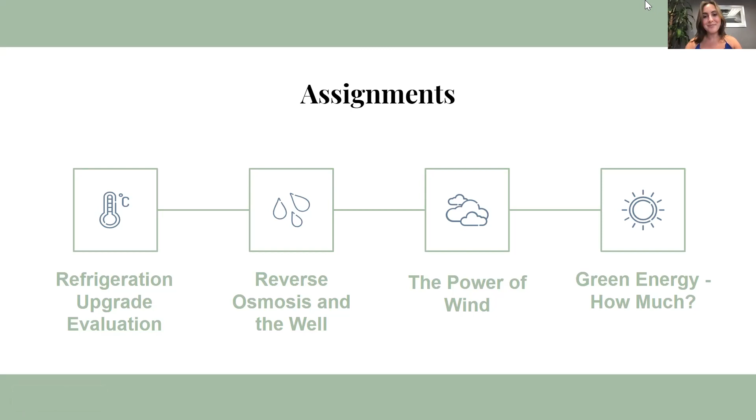The first topic the engineers will talk about is the new refrigeration system. I'll start this section off by showing you a video I made. It's a quick one, talking about the new refrigeration system.

Wait, pause it, I can't hear the audio. Thank you, thank you.

The average home requires between 600 and 650 kilowatt hours a month, so 680 kilowatt hours is more than enough to power a home.

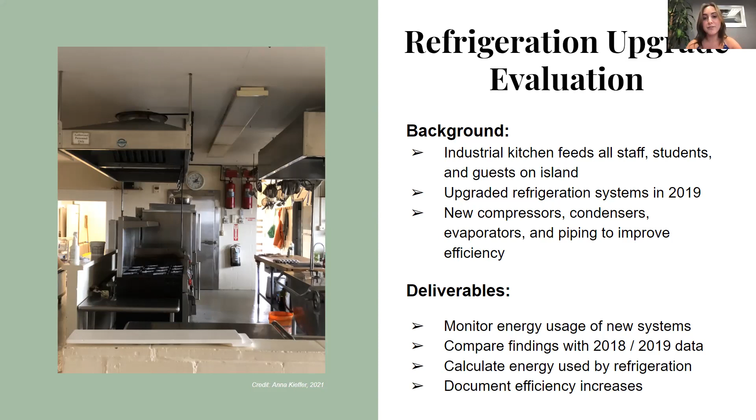Our first deliverable was to work with SML staff to set up metering to monitor the energy usage of the new refrigeration system and compare those findings with the 2018 and 2019 data. We also calculated the energy used by the refrigeration system as a percentage of SML's total energy consumption, and documented those efficiency increases realized through the installation of the new equipment.

As a result of the fluctuating sinusoidal pattern of an AC current, there are inherent inefficiencies in power distribution. Nevertheless, we're able to measure these efficiency gains through VARs and watts provided by the Fluke meter, which ultimately helps us calculate volt amps. A good way to visualize this is through the beer analogy.

So everyone visualize a cold glass of beer. Pretty much the beer represents the active power, which is the watts. This is the useful power, essentially the energy that is doing the work. This is the part that you want to drink. The foam on the top represents the reactive power, or the VARs, which is wasted or lost power. It's the energy that's being produced but isn't doing any work. You don't really want to drink this part, but the foam ends up on your upper lip anyways.

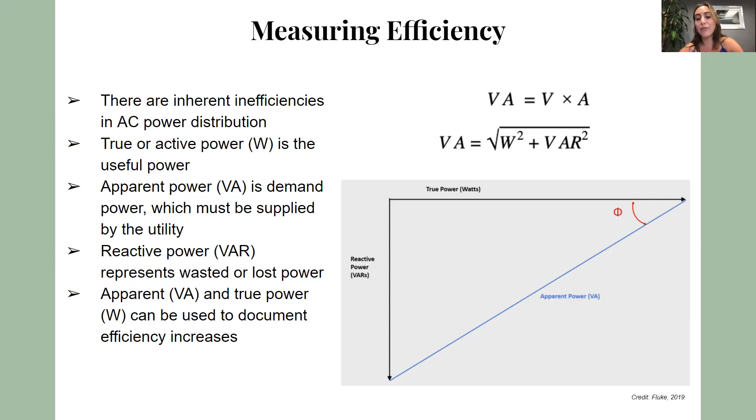The data was compiled onto USB and analyzed via the Fluke instrumentation software with the help of Justin Ulrich from Unitil. This Fluke meter collected both VAs and watts, and we were able to compare this data collected earlier this summer to the data that was collected by previous interns in 2018 and 2019.

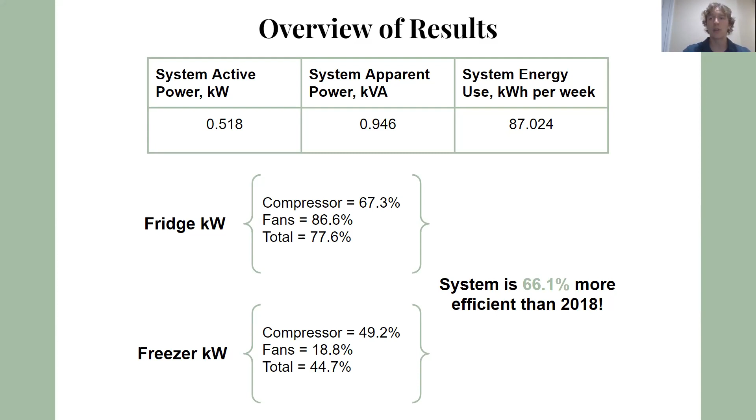So in conclusion, the efficiencies realized by upgrading the piping, condensers, and fans on both the fridge and the freezer reduced the apparent and active power by 48% and 66.1% respectively. This resulted in active power use of about 87 kilowatt hours per week, which, when spread across the entire summer, represents about 3.8% of the total island energy use — a drastic improvement from the old system.

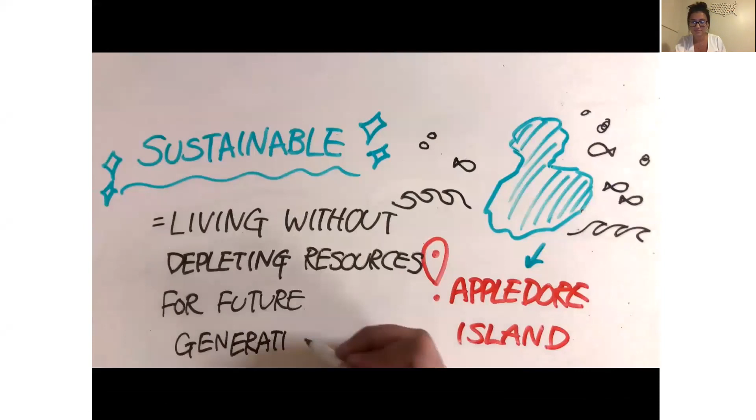Hi, welcome to Shoals Marine Lab. We are an island in the Gulf of Maine off the coast of New Hampshire and Maine, where we study marine sciences and sustainability. Being sustainable means being able to live without depleting resources for future generations and being mindful of what we use. While it's super important for all of us to be sustainable every day, it's extra important here at Shoals Marine Lab because we're an island with very limited resources.

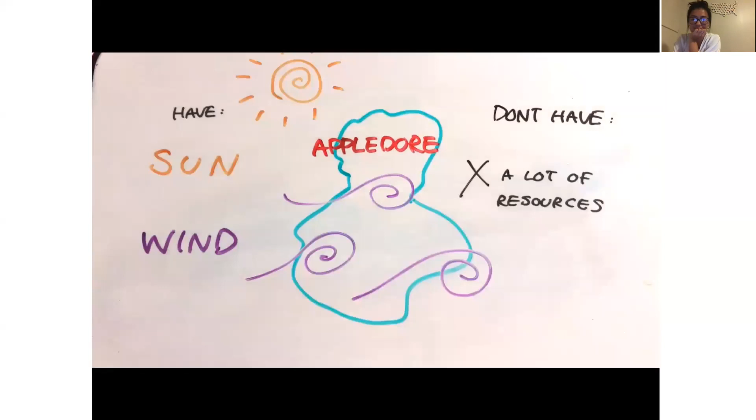Despite the limited resources, you know what we do have a lot of? Wind and sunlight, which is why we have a wind turbine and a lot of solar panels. We get the energy to power the island from the wind and sun, but that still leaves us with how we get our fresh water.

Although we're on an island surrounded by water, our fresh water supply is extremely limited because we have an abundance of salt water and not so much fresh water. We do have a well on the island that can supply us with fresh water, but it relies entirely on rainwater, so it's also extremely limited in how much fresh water it can provide for the island.

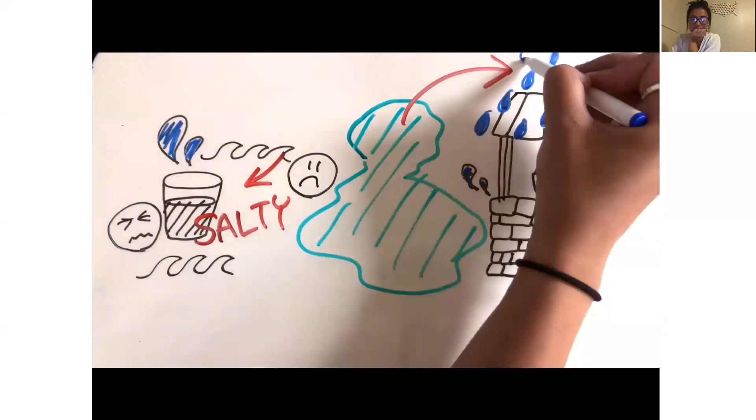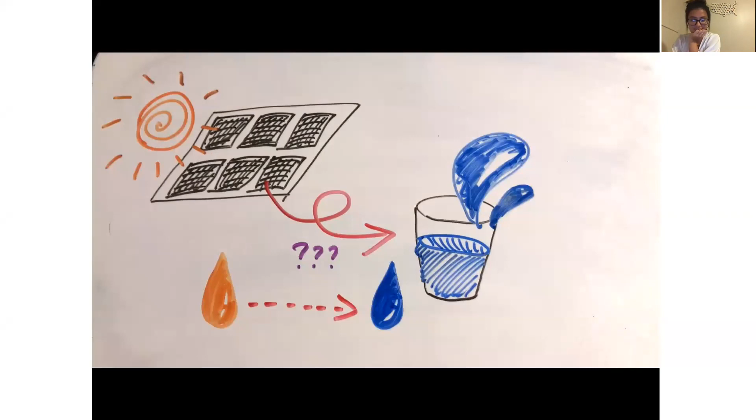So the question we've been trying to answer is: how do we get enough fresh water to supply the entire island from salty ocean water, while also not wasting any energy from the solar panels? The answer is a process called desalination — the process of removing salt from ocean water.

At Shoals, we use a reverse osmosis machine that removes salt from water to make it drinkable, also known as a live stream water purification system, and also commonly known as the RO.

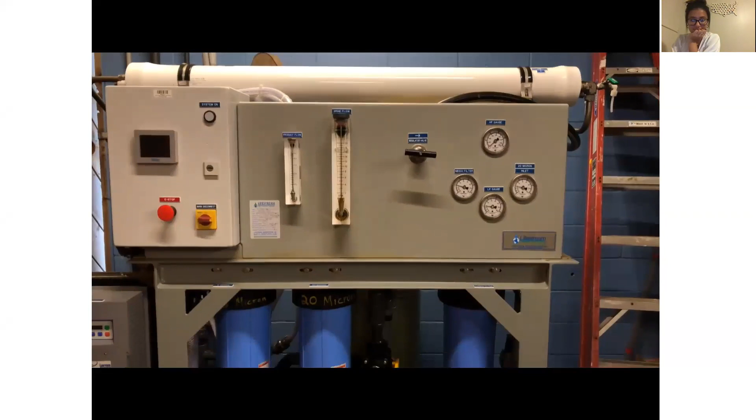This year, our engineers have been working to find out how to use every last drop of available energy from the solar panels by transferring the surplus solar energy into the RO to make as much fresh water as possible. They've looked at daily water use, rainfall data, energy usage of the RO, well water data, electrical demands of the RO, and more, so we can rely on the RO as more of a mainstream water source while making sure it's still efficient and powered by the sun.

Shoals Marine Lab is working to maximize its use of renewable energy by making sure not even a drop of it goes to waste. We make sure our solar energy is either used by the island or by cranking out fresh water from the ocean. While one RO isn't going to change the world, the concept of not wasting green energy most certainly will. Thank you so much for watching. Bye!

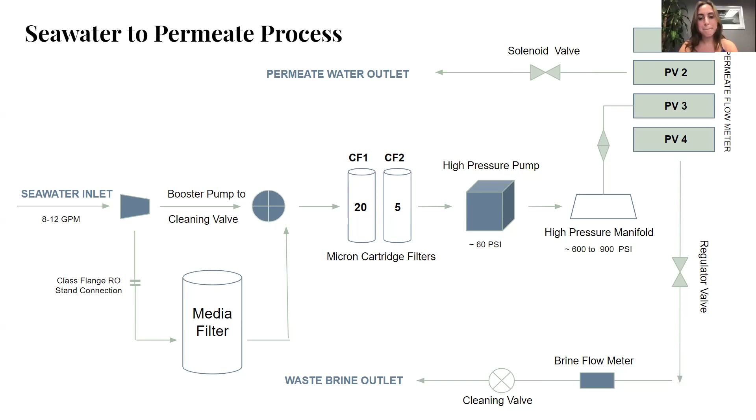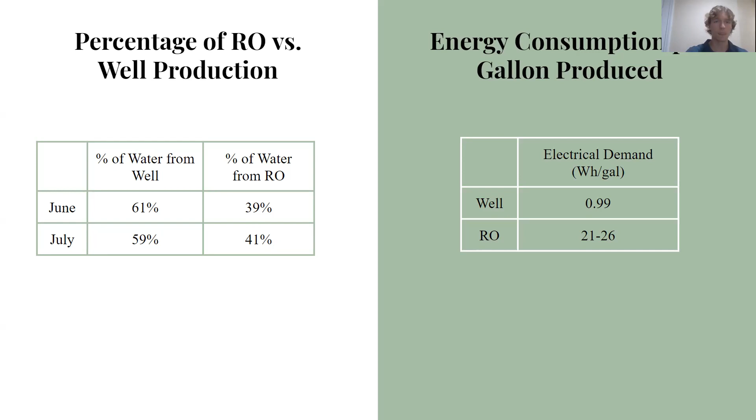Now, to obtain that well electrical usage, we use the fluke meter on the well pump. This pump activates once the cistern that contains the water to be chlorinated reaches a certain drawdown level, activates a pump that runs at 17.6 gallons per minute from the well. It runs for about half an hour and draws just over 1 kilowatt during that time period, resulting in just over half a kilowatt hour for that time period.

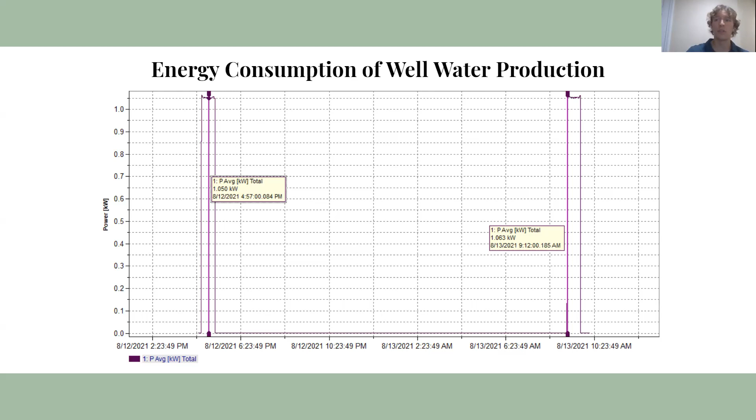Now, in terms of water production for the island's usage for the whole summer, the average daily water use this season was about 1,245 gallons per day. And while the RO can keep up with this demand if run for about 7 hours every day at its normal 3 gallons per minute, this is not what we would recommend. That is because it uses much more energy than the well.

If the well has enough water in it, we can tell that by the meter that was installed. We know the approximate water level. Then the well should be the primary source of water for the island. On summers that may be drier, we suggest running the island off of well water in the beginning, and once that well level meter reaches a certain drawdown level to be determined, then the RO should be activated and used to supplement the drinking water for the rest of the summer to prevent that well from running completely dry.

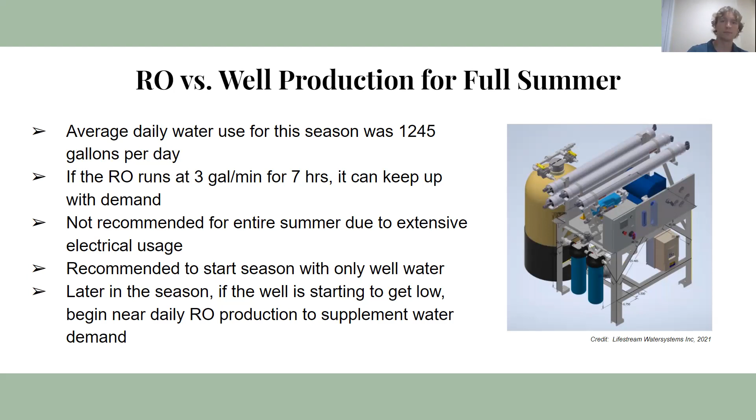After speaking with the manufacturer, it was recommended that the RO is run at a frequency of 54 to 60 hertz for the best health of the membranes. At this frequency it is less likely for particulates or small things to get stuck in the membranes and keep them not clogged. We also recommend to regularly backwash all the filters and the membranes of the system.

Brooke covered these various membranes in the schematic, and they are prone to clogging. So keeping those backwashed as well as flushed with fresh water to kill any potential marine microorganisms that may have found themselves in there is a good way to keep these filters clean and happy.

Furthermore, once the RO is activated in a particular season, it should be run every day or almost every day to prevent those membranes from fouling, which can happen if they are left to sit too long. And it should also be run for longer periods of time per day in order to improve that efficiency and realize the most out of the energy use.

Finally, as I'm sure most of you are aware, SML follows some pretty fun and stringent water use policies. The tried and true: if it's yellow, let it mellow, and not letting water flow unused. So we strongly recommend we upkeep those practices to reduce the water use on the island.

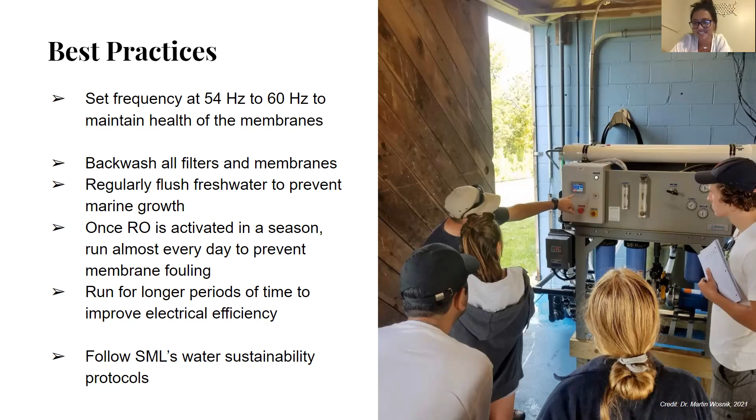And the third project our engineers are going to be talking about is the new wind turbine, which again, you will see a video that I made on this topic.

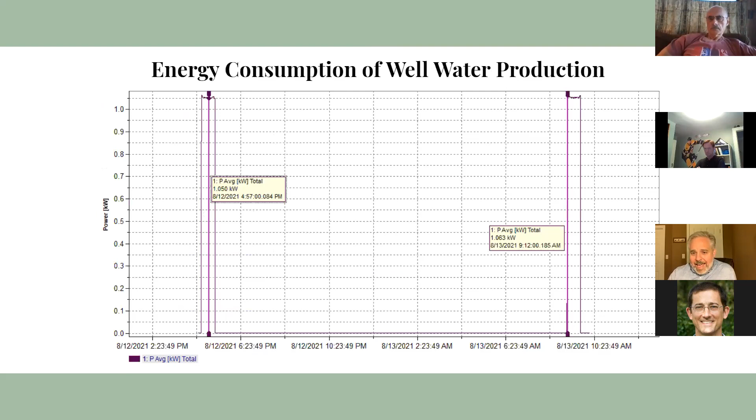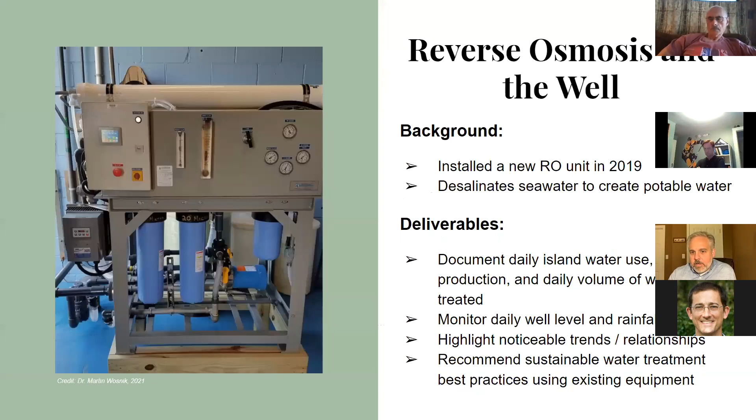I'm curious in regards to the fridge itself. Are there any specific design aspects of the new fridge we can point to that show why it's so much more energy efficient than the older fridge? Are there aspects in terms of insulation or things to that regard?

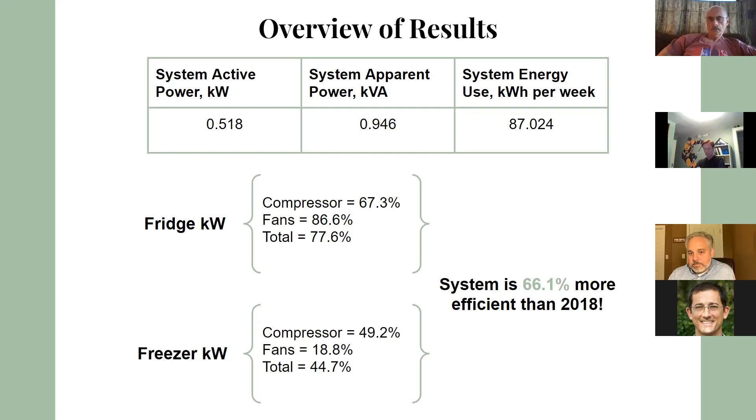So the old fridge was installed in the 1970s, so it was like 50 years old, and it was being very, very inefficient. I think just having an updated system was able to increase the efficiency by 2/3. But I could also pull up a bit of the model and look into that if you're interested.

Yes, please. I mean, the age certainly is a factor. That's something we talk about all the time with our own customers.

So Alec, I can just add my 2 cents here: the doors got replaced. That was the other thing, not just the energy running equipment, but the seals on the old doors were pretty bad. There was always ice between the freezer and the walk-in because of all the leaking of energy from the freezer. And of course, an old refrigerator with bad seals is going to make the refrigerator run more. So that was the other improvement done in that upgrade.

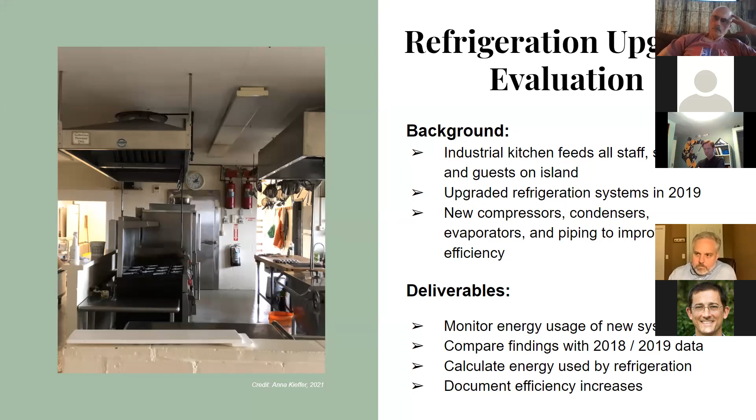Just a couple of comments, perhaps some questions to feed off previous people's comments. When you look at the RO power draw, because of the way that y-axis is scaled, it's not an incredible savings. You're dropping from like 4.3 to 4.2, and it looks like it pretty much plateaus there. Running that for a longer period of time, it's still going to be an incredible energy draw compared to the well.

So I kind of agree with Jen there. If you can run this when your supply of power exceeds your demand, during very sunny afternoons when your batteries are full, you can go ahead and run this RO there, but still you have to create that balance, think about how much energy this is really drawing compared to your well, which is less than 1 kilowatt. Even at its max here, it's not even a 10% savings over time, even though it does become more efficient.

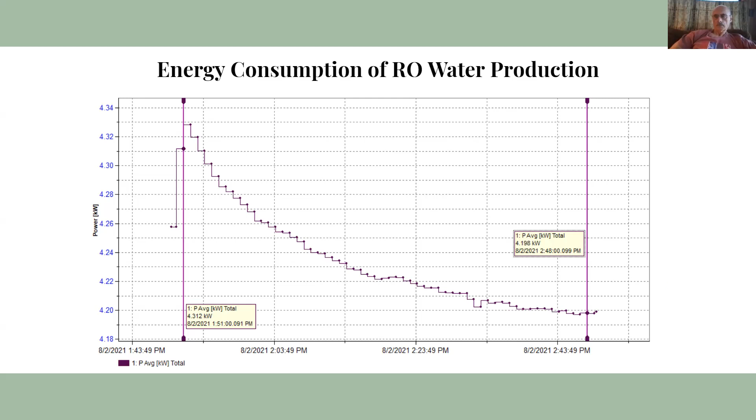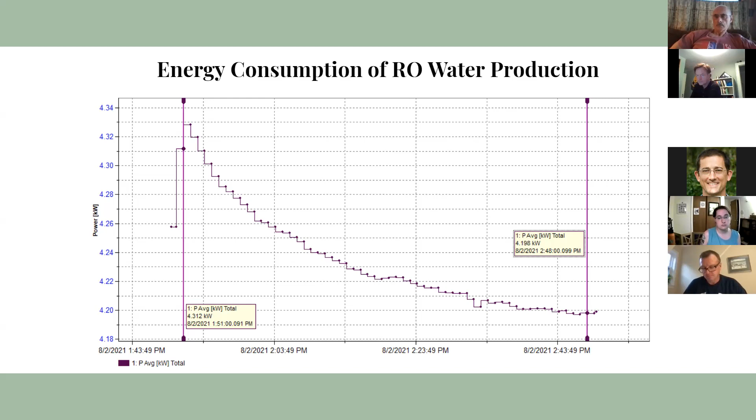And then back to Alex's point on the refrigerator, don't forget about conservation. For the staff, probably most of that conservation, if you think about it, comes from changes in behavior. I think behavioral changes in the kitchen could help as well, in terms of the number of times the doors are open, but also a full freezer and a full refrigerator are more efficient just because they're filled with materials that are the same temperature as what the freezer and fridge are trying to regulate, versus airspace where hot air, warm air gets in there. Also things like eggs are sterile, so it's not a big deal that they be left out for a while. Inside that membrane, eggs are sterile and they don't need to be rushed right back into the refrigerator. So just behavioral changes like that could help as well.

That's a good point. Thank you.

Glenn, the eggs go into the reach-in refrigerator, so we couldn't save on that one, not with eggs. Well, good, I'll think of something else that's sterile and let you know. Okay.

Actually, I got the mic here. Chris, go ahead. You know, July, I don't know what it was on the islands, but July was one of the wettest months in decades right here. Was that the case on the island? And why were you running RO during the month of July?

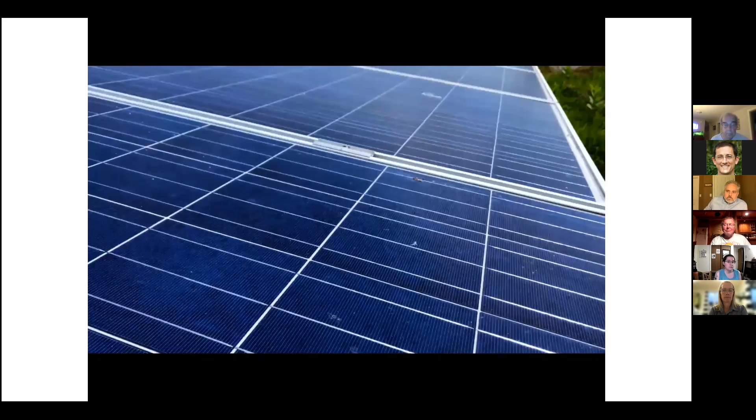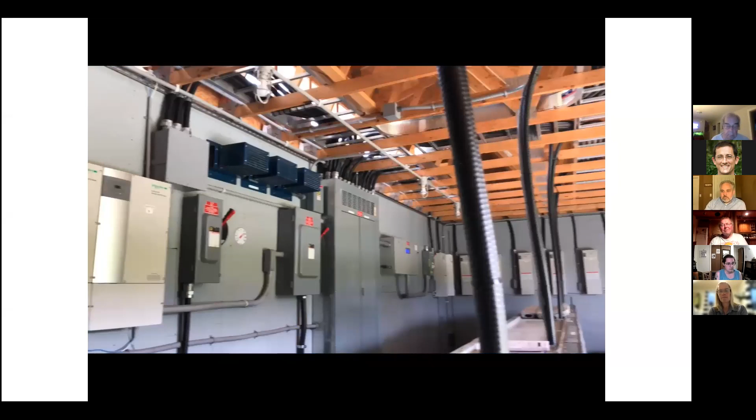As part of the Sustainable Engineering Internship, we were tasked with looking at this new wind turbine, which was just installed, and trying to see if it's producing the energy it is rated for from the manufacturer. We've done some graphs in the past few days looking at the theoretical power curve, or what the specification sheet listed it should be producing, and then we graphed the actual power curve of what it's actually producing over the past few months, and they are very aligned. So it is working up to code, which is very good.

So at Shoals this week, the wind turbine has generated about 30 kilowatt hours of energy per day, which in a residential home would take about 20 days to generate the monthly energy consumption of 600 kilowatt hours.

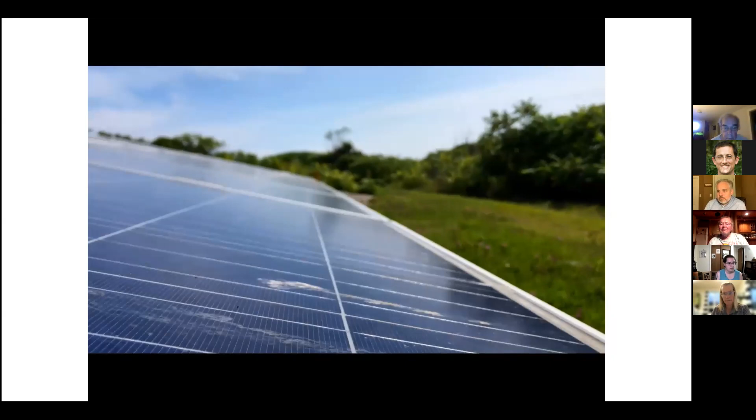So overall, wind turbines are a lot more efficient than solar panels. In fact, they're about double the efficiency of solar panels, whereas a solar panel can produce about 23% of energy per day, wind turbines can capture about 50% of energy. As opposed to solar panels, which need sunlight, which obviously is not out at all times of the day, wind can run during the day and especially at night.

As an environmental engineer and marine biologist, it is an absolute dream to be on this island. It fuels my heart just how the wind turbines fuel the world.

Wow, was that good? That was it. That was so good, that was so good. Thank you so much, Anna, for embarrassing me.

But now it's time for the Power of Wind assignment, which is our third assignment.

So just to give you guys a little bit of background, Shoals Marine Lab operated a 7.5 kilowatt turbine from 2007 up until the spring of 2019, when the turbine started experiencing internal electrical failures. The unit was then replaced in the spring of 2021 with a 10 kilowatt Bergey wind turbine and an upgraded VCS2 charge controller. So wind power contributes significantly to SML's green energy grid because it has the capability of providing power at night and during stormy weather when the island's photovoltaic systems are less effective.

Under the direction of Professor Martin Wosnik from the Department of Mechanical Engineering at the University of New Hampshire, we were asked to quantify the energy output of the new wind turbine and then compare those findings with theoretical outputs suggested by the manufacturer. Ultimately, our job was to confirm that the turbine is operating as expected and provide an analysis of the contribution wind energy is making towards Shoals net energy production.

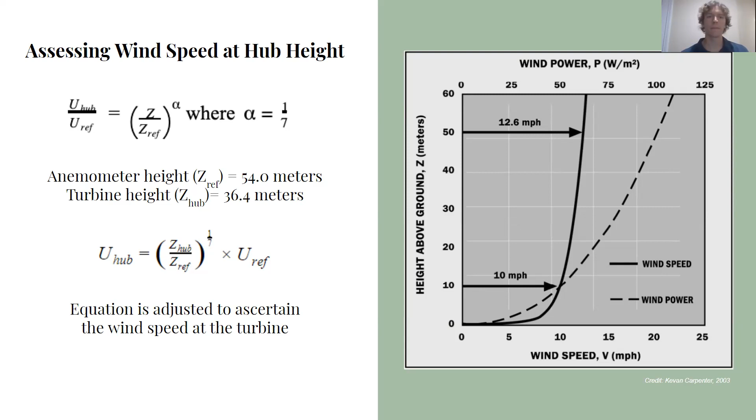So the amount of power generated by wind turbines depends on density, velocity, volume of air, as well as the swept area of the wind turbine blades and the blade design. Due to generator inefficiencies, friction, and blade design, wind turbines can only convert a maximum of 59.3% of the kinetic energy into mechanical energy, and this is known as the Betz limit. Therefore, the coefficient of power is used to determine the efficiency of the turbine's power production relative to the maximum power available in the wind.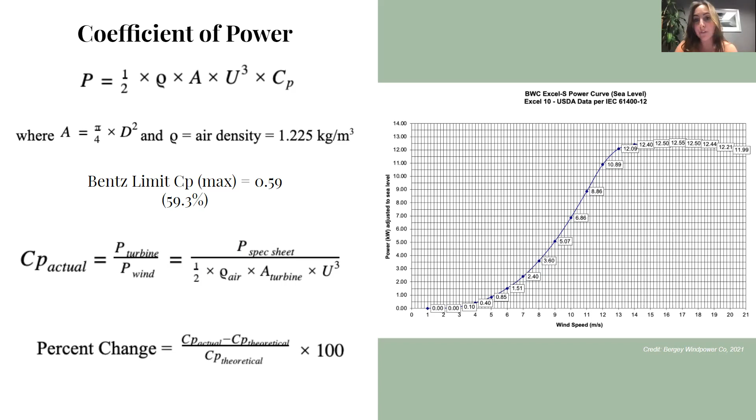So on the right, the tabulated power curve shows this logistic growth rate, graphing the power output versus the wind speed. At around 12,500 watts, it reaches maximum power output. We're not sure if this is just wind or if this is because of the coefficient of power being the theoretical maximum efficiency for a wind turbine that can convert kinetic energy into mechanical energy.

Now, extracting data from the dashboard, and it was like 60,000 data points, we collected the wind speed from the radar tower and then its actual power output. That wind speed from the radar tower was then adjusted to account for the decreased elevation at the wind turbine, utilizing the equation referenced in the slide previously.

The actual power output and the wind speed were then graphed in conjunction with Bergey's theoretical power curve, which was displayed on their website. And as you can tell, the actual power curve is highly correlated to the theoretical power curve, excluding some minor outliers.

Now, while the average coefficient of power for the theoretical model was... I'm sorry, I mixed that up. Our average power coefficient was 24%, theirs was 21%. And so as a result, we are 14.3% more efficient in terms of coefficient of power. This might be because of a super windy, turbulent summer, and we recommend that interns in the future do more calculations to determine if this is entirely accurate.

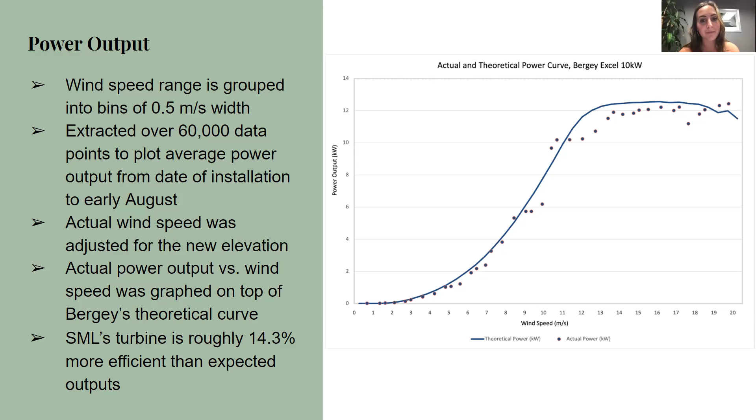So as Brooke mentioned, while we initially had realized a 14.3% more efficient turbine than predicted, we did run into a little bit of a data snafu just a few days ago that we need to address.

The charge controller from Bergey, which regulates the power output from the turbine into the battery bank, does not provide the power output data in a user-friendly way that can be displayed on SML's dashboard. So instead, we have another meter called the AccuDC that reads that charge controller and displays the data instead.

It was initially assumed that the AccuDC had a constant offset, meaning that even when the turbine was not spinning, the AccuDC was still reading a power output of about 0.3 kilowatts, and that this was constant no matter the wind speed or the power output read by the charge controller.

However, just a few days ago, it was brought to our attention that this is not the case, and we started taking data points to see what we could find. We actually realized this chart and relationship on the right.

On the x-axis is the power output shown by the charge controller. We know that because both the charge controller and the AccuDC both have visual displays on them, so we took these data points by just taking a picture of the displays at the same time since they're updating so rapidly. The difference between the AccuDC meter and the charge controller is on the y-axis, and the charge controller's real power output is on the x-axis.

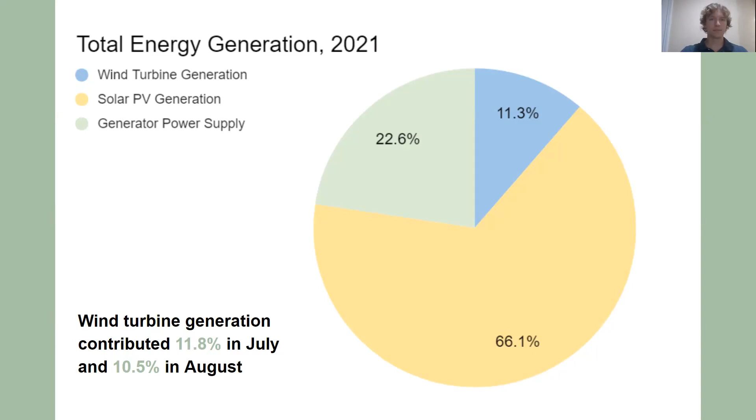Now, finally, I'd like to make some conclusions and recommendations on the wind turbine and its operation. For one, after speaking with a Bergey technician, the manufacturer of the wind turbine, he recommended that we do our best to limit the turbine's free spin. This happens when the battery capacity that the turbine is attached to reaches its maximum voltage and maximum capacity, and the generator disconnects and the blades are just spinning but not generating any power.

While he said this is fine electronically, it may lead to long-term damage of the blades mechanically, and we want to limit this as best as possible. We can do this by adjusting the float voltage or the set parameters of the solar and wind charge controllers on the batteries so that the interactions are more friendly and do not damage the turbine by letting it free spin.

In terms of the data collection by the AccuDC and the solar charge controller, it would be considered to install a third-party software to directly read data from the charge controller rather than rely on the AccuDC. Or alternatively, the AccuDC could be appropriately adjusted using that equation found on the power offset graph.

Using that equation that relates the power offset and the power output, we can adjust the data read by the AccuDC to then show more accurate data on SML's dashboard. So either adjust using that equation, or simply recalibrate the AccuDC and continue to observe that power offset to see if it makes a difference.

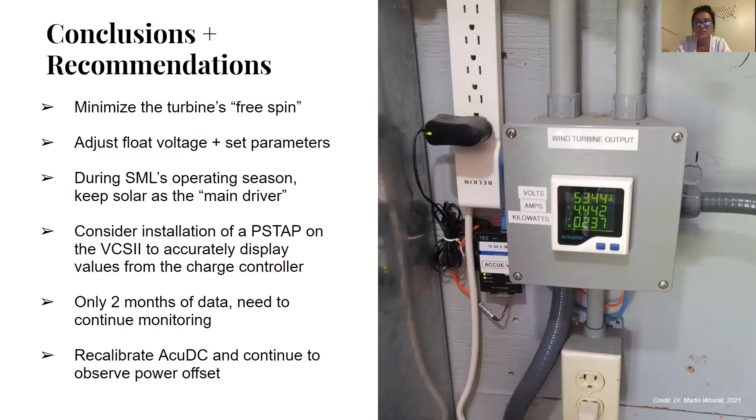So the fourth and final project is the green grid. I did not make a video on this, but I do have a final one, and the visuals in the presentation make up for that. So take it away.

Alright, so SML currently maintains 3 independent green energy grids that combined include 92 kilowatts of photovoltaic panels, 1 10-kilowatt wind turbine, and then 470 kilowatt hours of battery storage.

But during periods when stored energy is depleted, SML operates a 27 kilowatt diesel generator that's usually turned on in the night from 2 a.m. to 7 a.m.

With the help of Professor Martin Wosnik and Lee Consavage, Zach and I looked into how we can integrate the currently independent green grids with the goal of increasing the percentage of Shoals electricity production using green technologies. Using data from SML's dashboard, we analyzed the current ratio of green energy to diesel-powered energy sources, and then determined what additional infrastructure is needed to consistently reach those 95 to 100% green energy utilization rates.

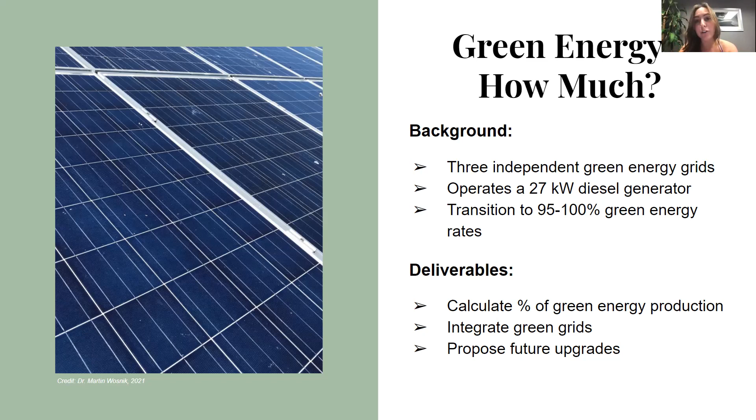Now, this is a very basic schematic that I made representing the relationships of the main grid, the K-house, and the radar tower. So the main grid supplies the majority of power for Shoals Marine Lab, and at rated capacity, at maximum capacity, it has 65.5 kilowatts between the photovoltaic panels and the 10 kilowatt turbine.

The K-House solar panels power the saltwater pump, which supplies water to the sea tables, the faucets, the reverse osmosis unit, as well as the fire hoses. At maximum capacity, it can produce 29.4 kilowatts.

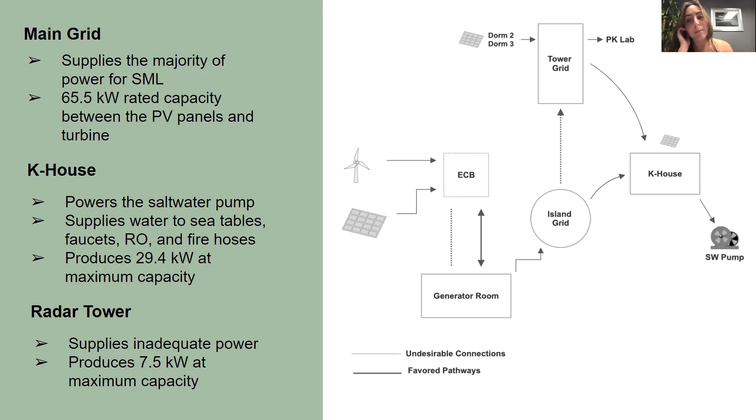And then lastly, the battery storage at the radar tower is outdated and therefore supplies inadequate power. As a result, the tower is always buying from the main grid during the summer, and data indicates it has gotten significantly worse. But at maximum capacity, it can produce 7.5 kilowatts of power, which then powers dorm 2 and 3, as well as the PK lab.

To improve the current percentage of renewable generation on Appledore, it's necessary that we calculate how much the island is currently relying on diesel generation. With that said, we summed up the solar generation and the wind turbines, as well as the generator production, and we compiled it all together to obtain the total island green generation.

With this, we utilize this as our denominator when finding the percentage of green energy versus the percentage of diesel generation. As a result, our results at the bottom show that the green energy percentage from July to August was about 76 to 78%, whereas diesel generation was about 23 to 21%. Our goal is to transition this from a 75 to 25 ratio down to a 95 to 5 ratio.

So as Brooke mentioned, the big money $100 question is how do we reduce diesel reliance? We can do that in a few ways, mainly these first three that I'm about to mention.

One, we can improve the communication of the three green grids so that they are not operating independently as they are currently. If they can communicate better and distribute and take energy from each other when one grid needs it more than the other, then that would reduce the diesel generation and improve the communication and compatibility.

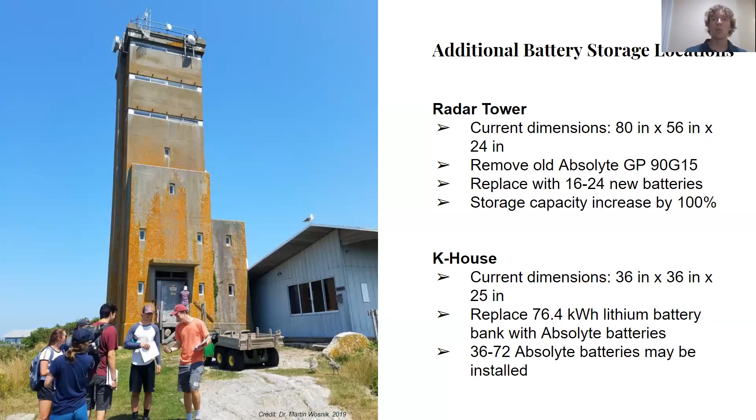So the major takeaways for this are that there are options for reducing generator use depending on how close you want to get to 100%. While that 100% renewable goal sounds wonderful, and it certainly is, it's not necessarily feasible, and you have to consider the trade-offs of cost and battery capacity and infrastructure necessary to reach that 100%.

As I mentioned before, just that difference between 99.5% and that 100% was a huge increase in PV and battery capacity.

Utilize the existing space and infrastructure that we have in hand. There are old PVs on dorms 2 and 3. We can remove the panels but keep the mountings and electrical equipment to save money there. Use the battery storage, use the space in the radar tower that's already set up to handle batteries. The equipment would need to be replaced because it doesn't match the Schneider equipment we have here in the ECB on the right, but the area is available.

I'd also like to point out that models are currently being developed by a couple of groups. Dr. Martin Wosnik from the University of New Hampshire is working with a couple students to accurately create a model for battery capacity and infrastructure necessary to reduce this diesel percentage. And I believe a group from ReVision Energy is doing something similar - that's Lee Consavage had mentioned that. So while these are preliminary estimates to consider, it's recommended that we compare these results with the results from the model.

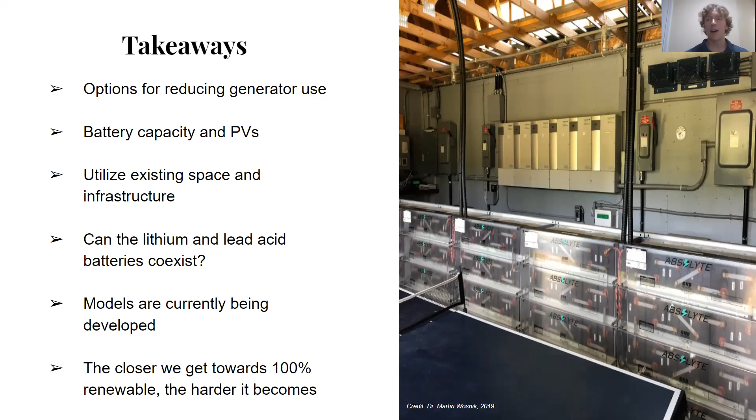Final takeaway, as I said, the closer we get towards 100% renewable, the harder it becomes. And I would love for SML to get there, but it will take a lot of infrastructure and cost.

Thank you so much for concluding that, Zach. One of our final slides is about future project suggestions. Unfortunately, Zach and I were only on the island for 2.5 weeks, and we were not able to get done or look into other projects as much as we'd like to. However, we do have quite a bit of suggestions for next year's SEI interns. The first one is anaerobic digestion to sustain the kitchen's needs.

This is fully credited to McLean Cohane, who is the island engineer on Shoals. He has an idea of directly utilizing the biogas from anaerobic digestion of food processing and sewage to then produce energy for cooking and hot water production. We think that this would be really interesting to look into.

And then also, with the brand new gym, we think it would be a really interesting social experiment to find a way to retrofit the cardio machines with energy producing generators to promote healthy and sustainable living while on SML. We do not think this would really have any substantial contribution to the grid, but we think it would be a fun social experiment.

Last two things: we would like the future SEI interns to continue the monitoring of the wind turbines' power output. It was a particularly turbulent and windy July, so as a result maybe our coefficient of power was higher than we would have liked. Additionally, after finding out about the power offset inconsistencies, we'd like to look into that more. And finally, once Professor Martin Wosnik and his students have the battery model up and running, we'd like to do further calculations to see how we can maximize battery capacity and storage on the island.

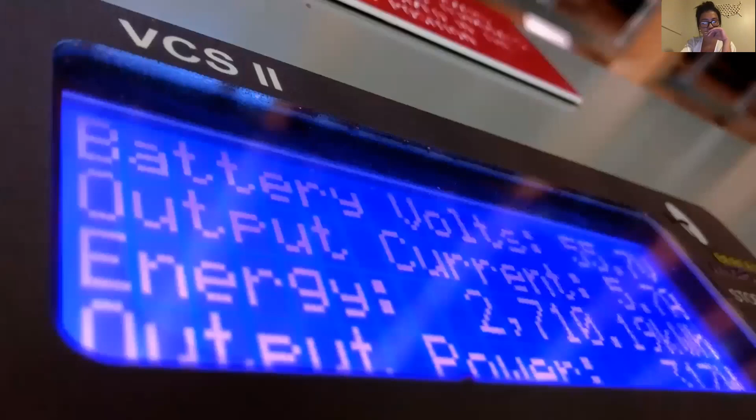I don't think there's anywhere else in the world where you can find a group of people that are as talented and as passionate and as motivated. Shoals is so cool because here on Appledore, I feel like everybody is so passionate about being sustainable, and they're passionate about the environment, and they just care so much about trying to live as responsibly as possible. Shoals is my favorite place in the world. It's hard to describe, but the energy here is just unmatched. Everyone is so driven and excited to be here that there's this electric energy of interest and curiosity and passion.

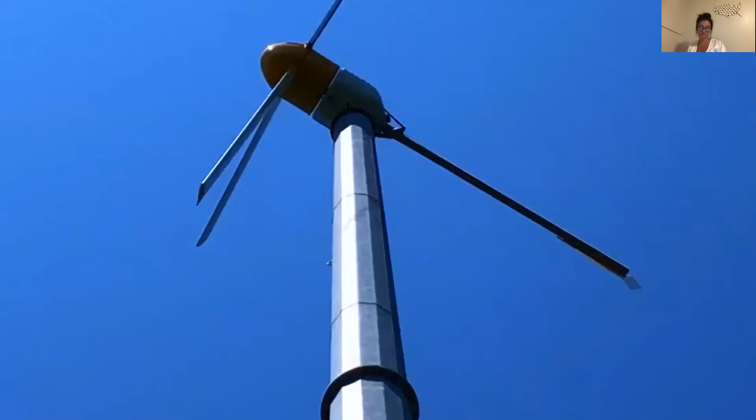Sustainability means relying on basically just yourself and being able to take care of yourself or your own system. And here on Appledore, we do a pretty good job. To me, sustainability means only using what you really have to, whether that's taking shorter showers or turning off the lights when you leave the room—little things that add up. So sustainability to me means being able to live responsibly off of the land and resources that you have without exploiting them completely, and being respectful to the environment around you, trying your best to take care of it as it's taking care of you.

That was great. Take two.

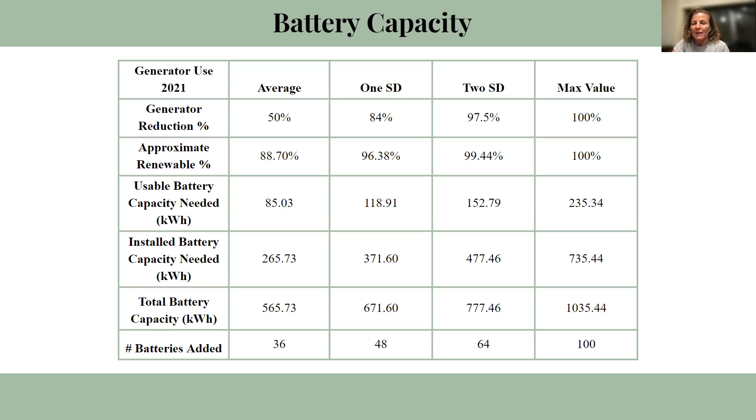I have kind of an overarching, take home message question for you guys. So after spending the 2.5 weeks on the island and engaging in these projects, what was the biggest takeaway message for you? There's a variety of topics that you studied, and I'm sure each of you had a different perspective. So what was the most interesting thing that you found from this work?

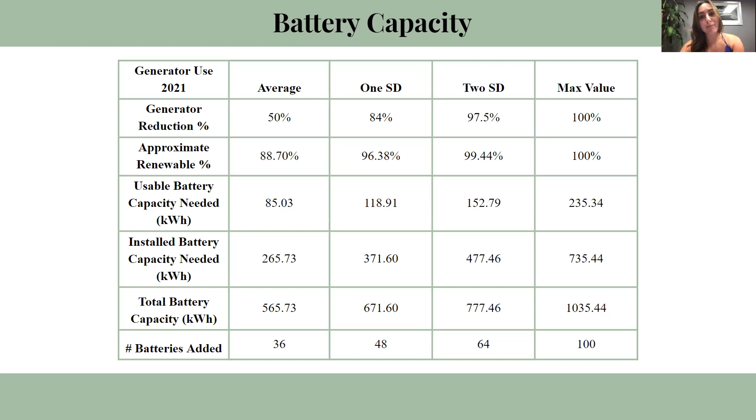I think for me, I was able to realize how seamless it could be to transition to more renewable energy generation just with my own lifestyle. There's a lot of utilities out there that are willing to do that for independent houses, and that was my main takeaway - that this isn't impossible to do. Also, I think another takeaway for me was that it helped me pivot my career goals a lot. Now I'm definitely more interested in offshore wind energy, and I'm interested in renewable energy even more than I thought I could be.

I would agree with everything Brooke said. I definitely think my career is going to trend more into the renewable energy portion. But like she said, it's really just getting the knowledge out there about how manageable and relatively easy renewable energy generation can be, and how it's applicable to your own home. These calculations really drove home the point that getting over that hump to reach 100% renewable, which is kind of most people's go-to goal, is more difficult than it seems.

While it's easy to implement renewable energy as a whole, getting that 99, 100% renewable is very difficult. And because of the non-reliableness of solar energy or wind energy, there might always need to be at least a little bit of reliance on fossil fuels, which is not what I like to think about, but it's somewhat of a harsh reality.

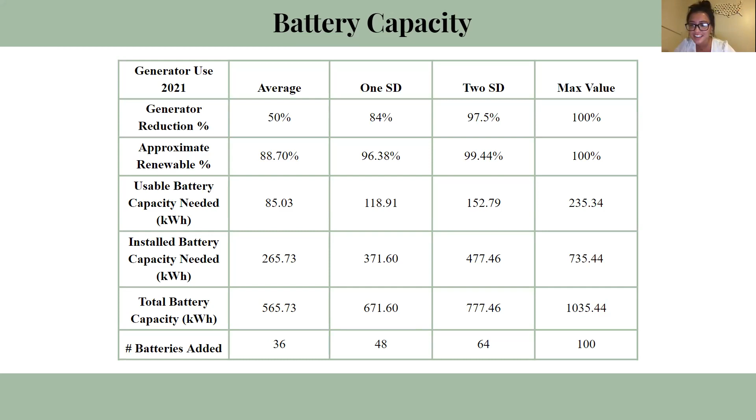I have a few things to say, but I also have my 5-minute presentation after this where I kind of talk about that, so I will be covering it then.

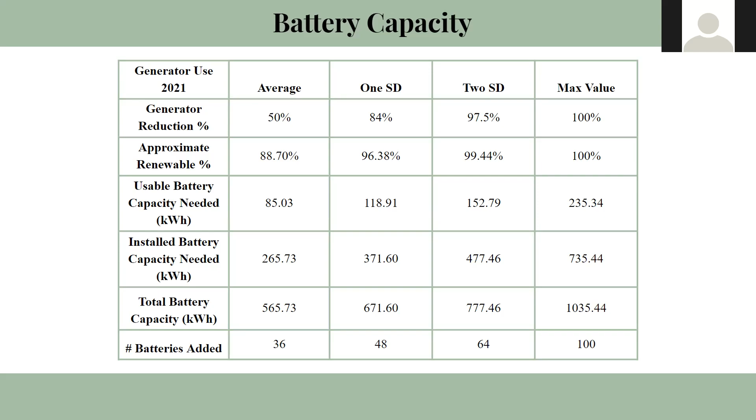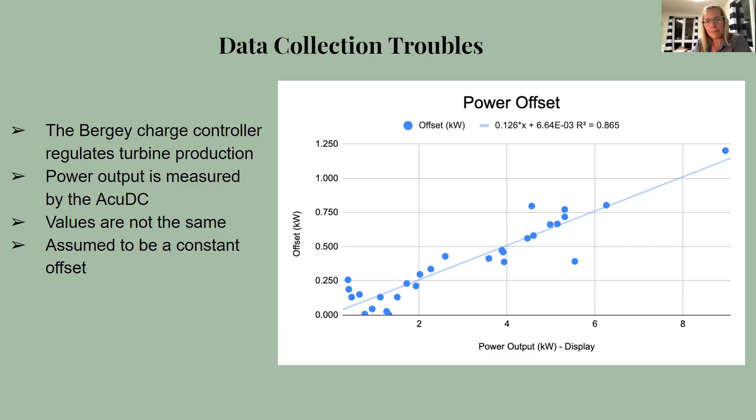Perfect, okay. Well, I do not have a slideshow, I'm just going to be talking for a few minutes. But again, hello, I'm Anna. I'm a senior at Cornell, and I was this year's Sustainable Communications intern. So basically I'm just going to talk very briefly about my background and why I got interested in science communication and why I'm basically here.

So I went into Cornell my freshman year very determined to go into academia, to go into research. And then I went out to Shoals after that summer as a student, and I stayed there for a bit. And then I came back to campus and joined a few undergraduate research labs. I was doing a lot of research work back on campus. And then during the pandemic, I had the opportunity to do a virtual data analysis research internship.

And I think that's kind of where I first realized this huge gap between science and the people. I was experiencing being able to see all this research that scientists were coming out with, all these cool discoveries that they were finding. And I felt like not a lot of people in the public actually knew about them. And I felt like I wanted to bridge that gap between science and the people.

And then around the same time, quarantine hit and I was very bored during quarantine, as we all were. So I started to pick up videography as just kind of a hobby. I taught myself how to do some quick edits here and there, nothing too special. And then I think that also made me realize the power of video.